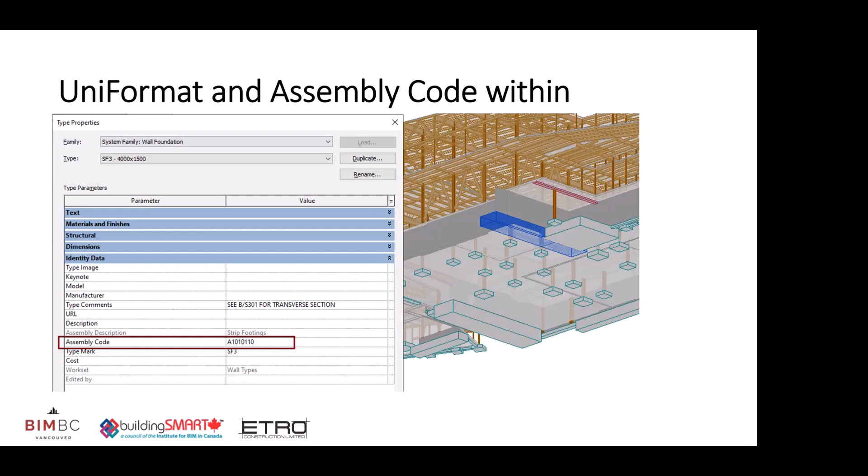So how can a BIM team support this? Finally, we came up with a very simple suggestion: we just need to ensure that in the structural models we receive, the assembly code that comes from them will be embedded. Why this? I will click through to show you guys why.

I know the level of knowledge is different in this room, so I will try to give a bit more feedback and background on how this is coming about and why this particular construction standard is used.

If we're speaking about design, this is how the assembly code comes inside Revit. I think the majority of you here, if you're using the BIM Forum specification and level of detail, this is already embedded—the UNIFORMAT is there, like if you're downloading the Excel spreadsheet. It's just about figuring out your cost code, which also has a reference inside the BIM Forum document. So it's nothing really wild and new that we discovered, it's just about making it consistent.

And making it consistent means bringing this matrix into your BIM execution plan and working with, in our case, the structural engineer to get it done. Here you can see that the levels of this code can go deeper and deeper—they can be measured like level 1, level 2, level 3. And this is exactly where we wanted to add, this is how we are moving forward.

So the LOD matrix, this is the thing, but why is this good? Because this Uniformat is based on the system and assembly, exactly like Revit is. You're taking your foundation, your slab, your wall, and you know which materials you're using. So it's exactly this assembly, if it's a substructure, a shell, or interior, this is already there. So this assembly code, how you saw it on the first screenshot, is already plugged into Revit.

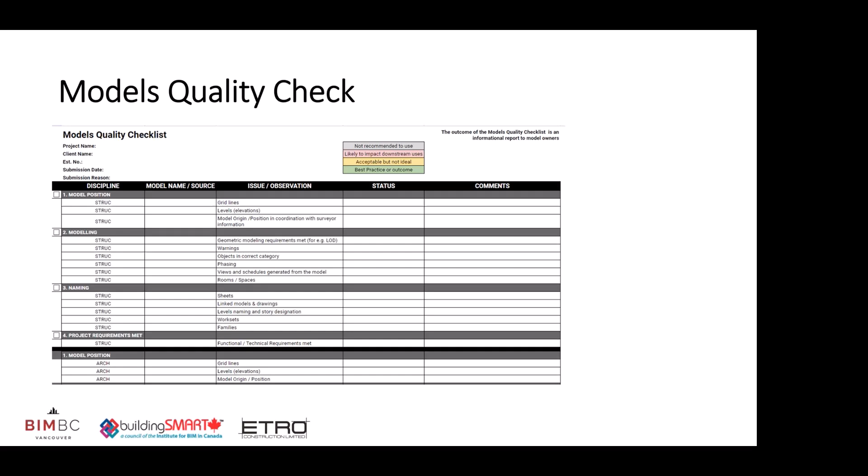So quality is the thing we're running through, and it's a big thing. We usually receive Revit models. If it's not Revit models, we load them into Revit and then extract to Assemble.

This is unfortunately one of the Autodesk products, but still my favorite, just because our estimator group isn't required to know Revit. Assemble reads the data from Revit - it's not rediscovering or calculating something new. You can add your internal formulas, you can modify data, and I'll show exactly in this slide how. But the key is that it's very user-friendly and easy to filter.

Whatever you have in Revit, you will find here, and this is a great tool for quality control, obviously. I think Sean will maybe speak to this direction as well, how it works. So exactly, we use that for providing the quantity takeoffs for the user. Usually it comes out as an Excel spreadsheet.

Yeah, like an Excel spreadsheet, I guess. So here it is. This project, we ensure and communicate with the structural engineer that the assembly code is in.

I have to admit, it's back and forward. Some objects are not clear what assembly is going in. And this is exactly why we need the LOD nailed down in the BIM execution plan, and why we need kind of blessing from the structural engineer.

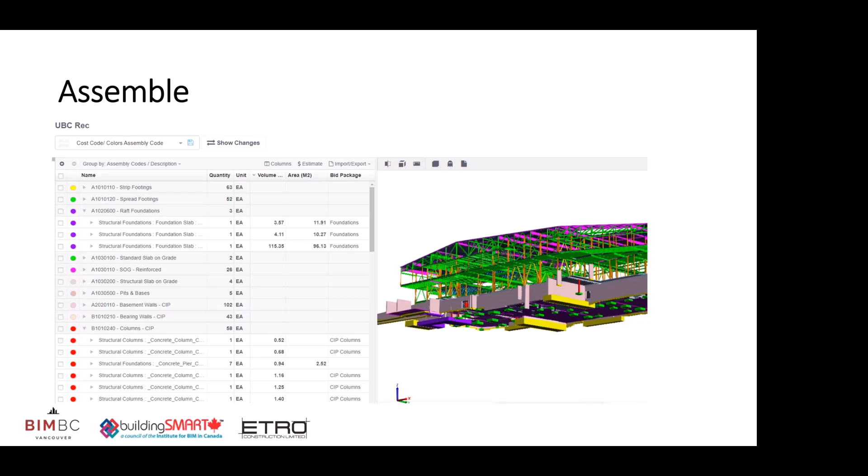And the other cool thing about Assemble is, as I'm uploading models, they get versioned, and I can basically compare the previous set with this one. The most useful thing is seeing the type and quantity changed in terms of the total volume.

The information about what was deleted and what was added, that's a tricky one, because each of you, I think, knows, or maybe doesn't know, that Revit, as you're placing an object, gives it a certain ID, right?

If it's not nailed down in your model code that you're not allowed to delete objects without a reason, it still happens. Maybe a person just wanted to change the type of wall, but instead of modifying it, they delete the wall and place a new object, right? And then this wall gets a new ID, right?

Logical. And this is the reason why we may see this as added, when it wasn't actually added, but changed, right? It's kind of a tricky technical point, and it's the reason why removed and added don't really work well in terms of the data and quantities.

Here I am with this solution, assembly code, trying to filter the data so it can be utilized easily with the cost code. Thank you for your attention.

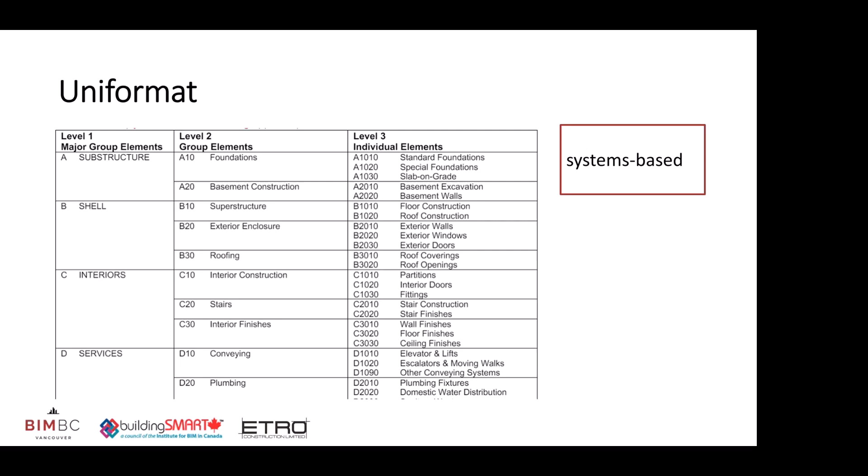I don't know how to answer why the industry uses master format instead of Uniformat, but I know why we have our cost code. For example, Etro has their unique cost code. Master format is 6 digits; we have 5, just because it also works with our accounting software. So I wouldn't say it's master format, but since it's 5 digits and our accounting software uses 5 digits as well, it's already combined.

If I'm doing estimating, then later on they go to billing, to the billing period, and they use the same codes. So with the Uniformat number, for me, it's not that clear. But again, I've only done a little bit of Revit, so probably you guys are the experts.

But we follow industry - I think master format has been used by estimators for a long time. It's just very hard to change the standard. Everyone understands master format from the subcontractor side, client side, GC side. BIM is more like your own group, and I'm trying to - that's why I'm trying to learn as much as I can.

But just for simplicity, even to show the budget to the client, I won't be showing all 48 master formats. That's why we focus on kind of 16 divisions. So that's why it's unique. Probably Turner and other construction companies have their own codes for how they follow their budgeting stage and process, but that's just our own.

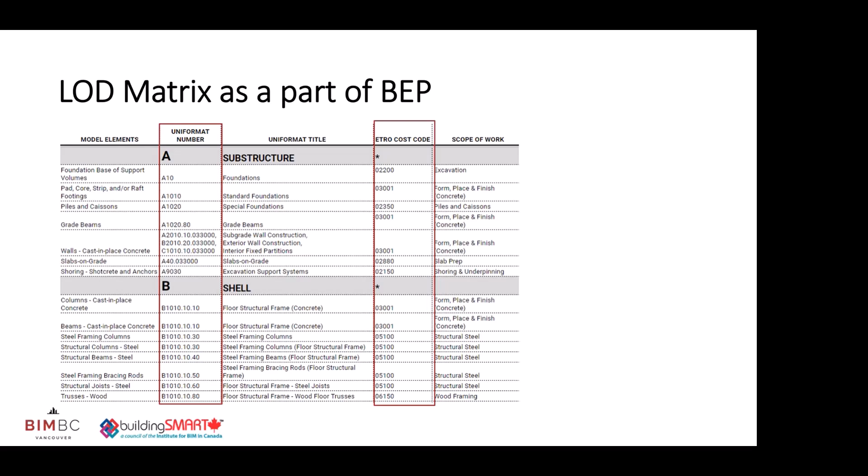So I'm going to talk about our approach, which is somewhat different to Etro's and Bert's approach, I guess, to how we do quantity takeoff and work with our estimation teams.

Typically, just to give you a timeframe, we usually start this in the pre-con stage. It can sometimes also continue through construction. The way we produce our models is aligned to our different classes of estimates and what our estimation pre-con team require, and also tends to align with the design submissions, so whether it's DD, CD50, CD60, whatever it may be, it tends to align with the submittals.

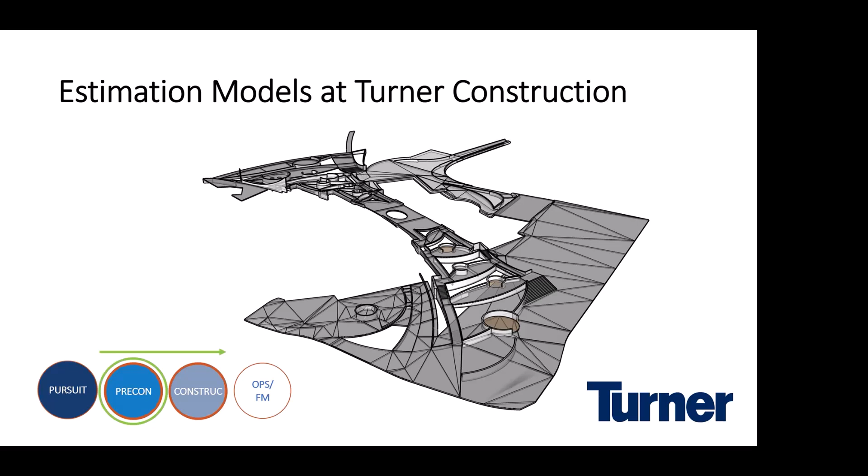In terms of our workflow, to give you an overview, we take the design documents - design drawings and any 3D models that may exist. We like to ask for 3D models. In the past, we've not proactively asked for them that early on, and that's something that's changed in working with our pre-con team to make them understand that asking for the model is a crucial thing. It helps us save a lot of time.

Having said that, we only use it for reference. We don't actually use it to produce our estimation models. We typically start from scratch and take the drawings and produce our own models. So a different approach to using the existing models.

So we review these, we want to understand the design, and we want to understand what quantities our estimation team are requiring. This may vary how they price jobs, and what estimates they're producing, and the quantities vary job to job. Typically they'll have their templates, but they'll alter those to suit each job. So we want to understand that, and then we work together to do that review, make sure we understand from our estimation team what they require, and make sure they understand what they can expect from the models.

We then go away and produce the models. As I mentioned, we recreate these from the drawings, and I'll mention in the next slide why that's been a benefit to us and why it's important. But typically we have 3 main models that we produce on most of our jobs: a control quantity model, a building envelope model, and a concrete model.

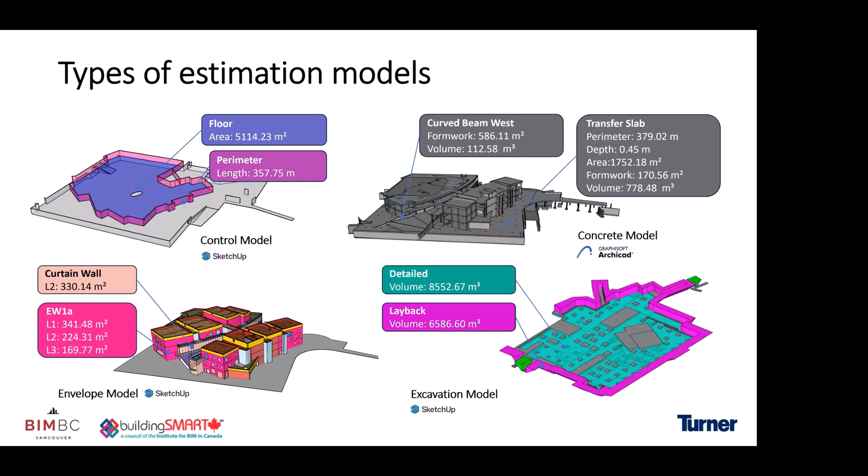In terms of outcomes, it's definitely more accurate using this approach. Traditionally, doing quantity takeoff for things that are curved or at different elevations can be a lot more time consuming and challenging, so modeling is a great solution to overcome that. There's also visual communication - demonstrating to clients how we've produced our quantities and what we have. It's just a great visual tool for that.

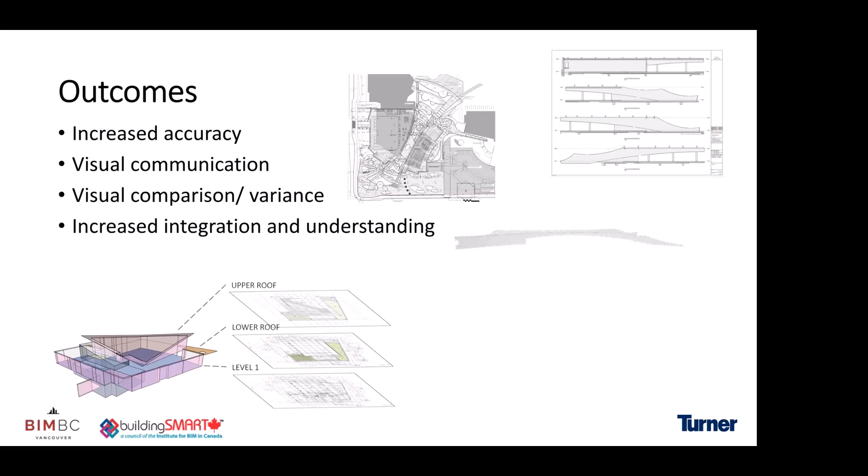Also just understanding the project early on, going through the drawings and showing a model to our teams. And then there's the comparison piece - different submittals or classes of estimate produce a new set of models, and we're able to compare them, visually show that, and with the quantity outputs we have, it's just a lot easier to compare like for like.

And then this increased integration and understanding. I think we've had a lot of success recently with the integration we have with our estimation team and pre-con as a whole in just being able to be on the same page. We've figured out a process that works on both ends in terms of what input information we need and what output information is needed too.

So for this specific purpose, these are specifically the models we produce for estimation. Typically it's more of a visual support tool, an aid, but it's also a way to get accurate quantities that are more reliable. So we wouldn't use these then for construction.

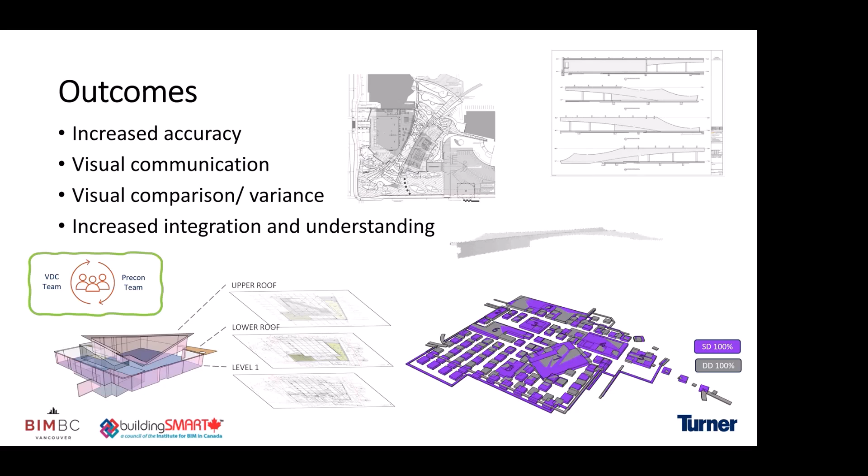I'm Shuwen, I'm with Bird. I've been with Bird for about 4 years. Before Bird, I was with Turner, not in this office though, it's two blocks down in the old office. I started my VDC career in the States, so I was also with Turner in the States.

Today I want to talk about, we also utilize Assemble and use the data, but what happens after we get all the data from Assemble, this is more about operation and on-site, mainly about a live interactive dashboard that we created from Assemble. Before I start, I would like to play a video.

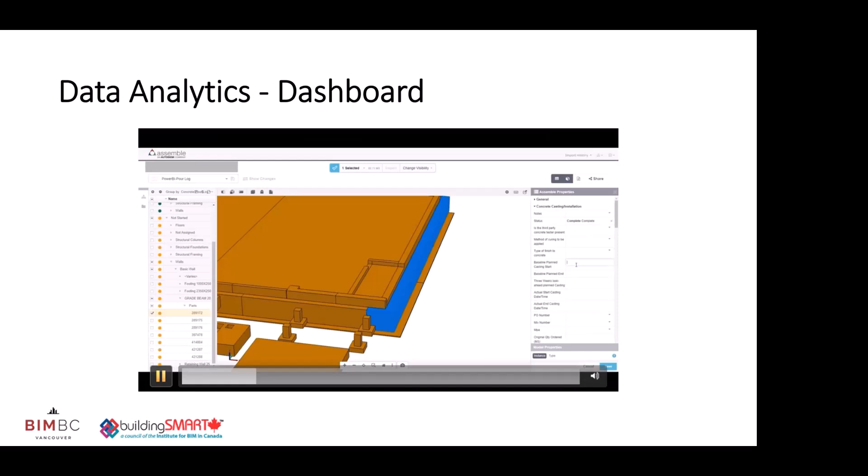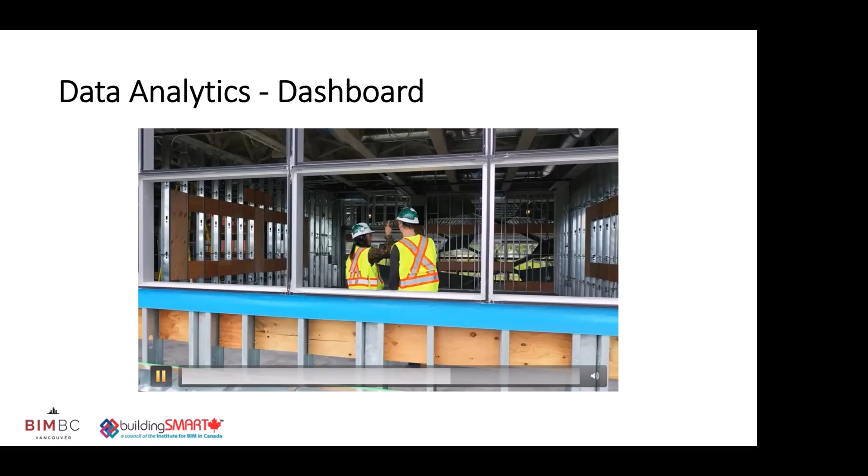At Bird Construction, we are integrating the advantages of digitization with our construction expertise. We want to emphasize the benefits of construction dashboards for our projects. By consolidating activities on a digital platform, we provide real-time access to project metrics, promoting a shift from passive to proactive decision-making. Our model-centric approach enables the collection of extensive data across project stages, boosted by tools for model conditioning that enhance collaboration and data management, and platforms like Power BI for data centralization and analysis. The most significant challenges were to identify and replace inefficient manual processes with automated workflows and real-time data input, allowing well-organized data management and analytics, helping to reduce project delays, schedule slippage, and achieving significant cost savings. Bird Construction's initiative marks a revolutionary shift towards a smarter, more efficient construction industry. We are not just building projects, we are constructing the future.

All right, so let's delve into the details of how we do it. We actually have a different workflow, kind of a workaround to separate the design model from the construction model. We're utilizing the construction model, but we're using parts in Revit. So who's familiar with parts or has ever utilized parts before?

Okay. Well, there's another plugin called PCL Parts. It's actually more robust than the native Revit parts. It's a plugin, it's free. You guys can try it, feel free to download it.

So what we did is step one, we have a parts template. What parts does is we have a blank template model, and then we link the design model in here. Then we create parts from the design model. That way the parts act as a layer of elements on top of the design models. So if we make changes to the parts model itself, we're not making changes to the original design models. I see some of you are confused, but it will make more sense later on.

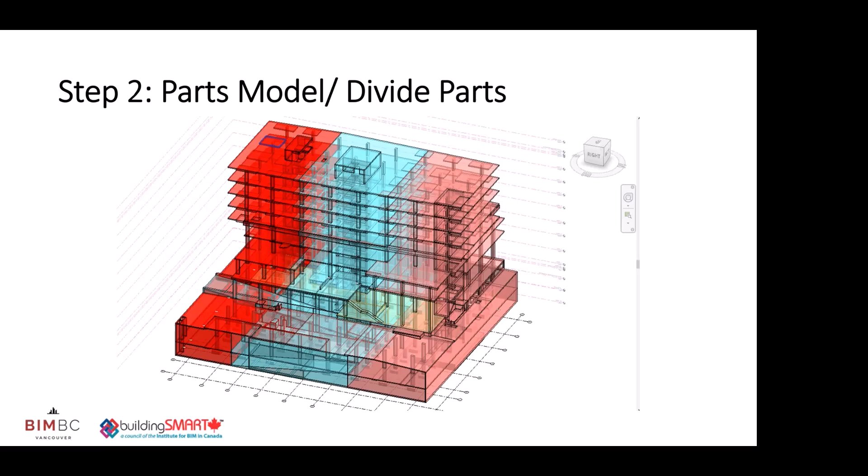Once we have the parts model, we divide them, give them a color code. We can export the pour schedule sheets from Revit as well. This is a snapshot of the parts in this model, it has all the information - your levels, your zones, your family, your quantities.

We also have 4D codes here, which link to the P6 or MS Project schedule, which opens a whole different conversation. I won't go into too much detail about that. But in the Revit parts model, you can do data input, or you can use this model as an output.

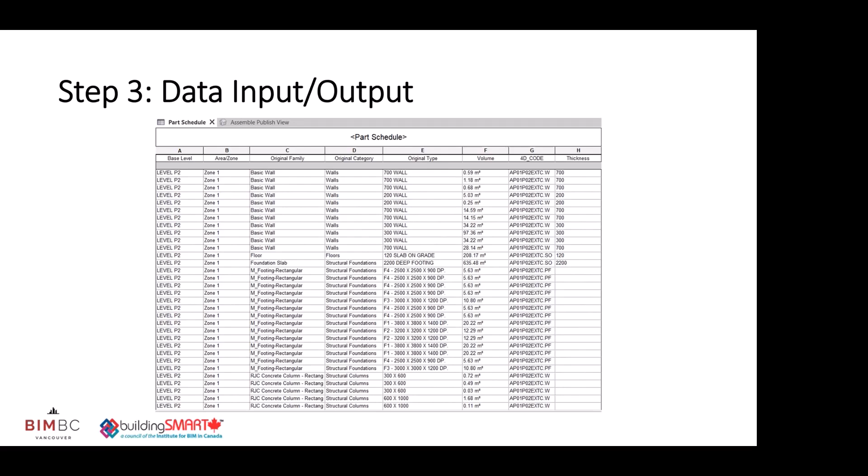To export your parts model to Assemble. So for you guys who aren't so familiar with Assemble, Assemble has model properties which export directly from your models, which in this case is our parts model. So in here you can see there's 4D codes and some basic information in the model.

But then Assemble has its own Assemble properties, which live on Assemble on the cloud. So you can make modifications however you want to. We have different categories - we have an estimation category, we have a material tracking category.

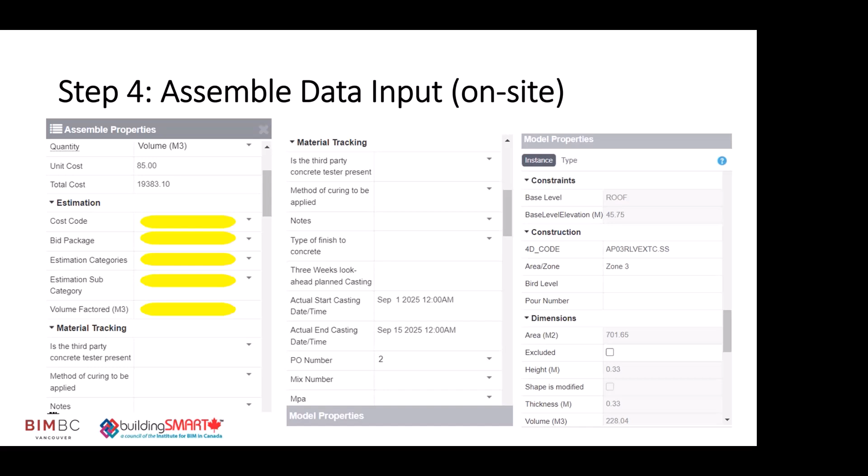So in the material tracking category, this is where our site team has their input. For example, here we have the actual start date, actual finish date, PO number, or even concrete testing and all of that information.

So talking about site involvement, we want to push the site team to collaboratively work together with the VDC team, not just us doing everything with the models. So the site team, we train them - hasn't happened yet, it's the ideal world.

The way we set up our parts model, we set up different views, different sheets. All they need to do when they want to make modifications for their pour break is come into the model, go to the floor plan, whichever they want to modify, and click on the parts and edit the sketch. They can either draw the line or even change the shape. It's no different from them making modifications to their Bluebeam schedule drawings, right? So with it, probably a couple more clicks, but it makes sense.

And then it creates a drawing for you right away. You can export to 2D if you want, and your quantities are there for you. So our ideal situation is we want to train the site super or field engineer, whoever is tracking the concrete, to do this task - they're just drawing lines and changing this. Each of our sites have their own Revit license, or if they don't have a license, they can use tokens.

And so they should be the one doing this because they have the first-hand information.

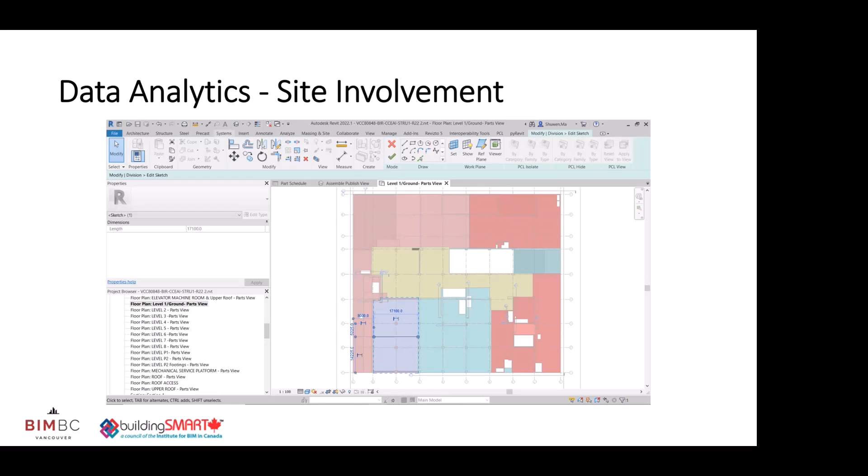If we can have these views pre-saved for them, for example for the next 3 weeks, all they need to do is open the app on their phone, come into the view, and multi-select a couple of foundations, for example if the foundations are happening outside right now. They come into a view, select it, and all the highlighted yellow fields are the ones they can fill in on their phone.

So they click the foundation, put the start date, or even later after concrete is poured, they can put in the different testing results, 3 days, 7 days, and so on.

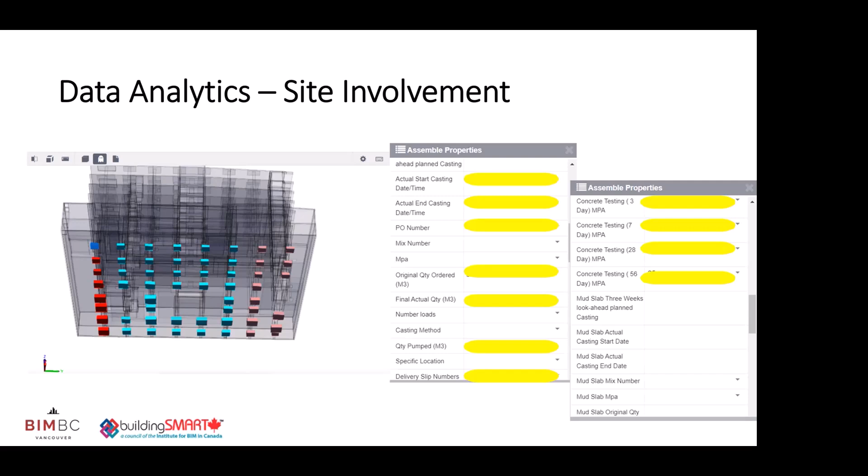With all of this data inputted into Assemble, now it gets to how we utilize data to build a dashboard. For a dashboard, first you need a database. Power BI has connections with both Assemble and ACC, and now they're even trying to connect with Teams or SharePoint, so that can all act as a database. Or if not, you can simply export all the data to Excel, so Excel can serve as a database. Once you have the Excel database, that's where we transform the data from Assemble into a database.

The next step would be data modeling. It requires a little bit of work, like adding equations for however you want to calculate your quantities from Assemble, or some simple coding to organize your data and eliminate the data you don't want to see. This all happens inside Power BI and Excel.

Then the next step would be data visualization. You can pick however you want to showcase your data dashboard, either a pie chart or a line graph, whatever works for your site.

And this is the interactive dashboard we came up with. Everything is interactive, and the data is also linked to Assemble. You can have the data refreshed automatically, or you can do it manually, but you know the data is accurate because it's all on the cloud—that's the beauty of it. Every time you have a new input...